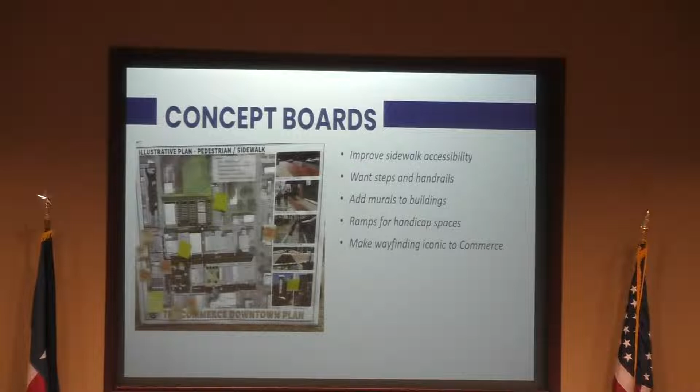We had shown some concept plans at the last meeting, and we got a lot of feedback on that. So we've taken all the feedback and you'll see that in what we're presenting tonight, along with some specifics of the things people mentioned to make sure we were including to make it walkable.

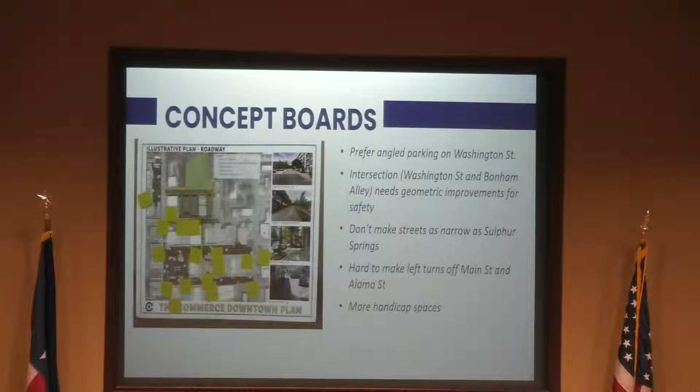We talked a little bit about parking and angle, parallel, where do we need parking? We heard from you all that we were looking initially at trying to widen the sidewalks as much as possible, and we still are. But we heard from a lot of folks that parking is really critical, and we don't want to lose the parking that we have. So we made some adjustments to some of the things we did based on your comments, and got some input on some areas that may be a little hard, where we need to figure out safety and how people turn and so on.

So those were some of the comments we heard. A couple of higher priority items: we had some concepts for both the plaza and the farmers market. For those of you who were here, we presented a couple of different options and got some really good feedback on that - what are the key elements we want to include, such as shade structures and water feature.

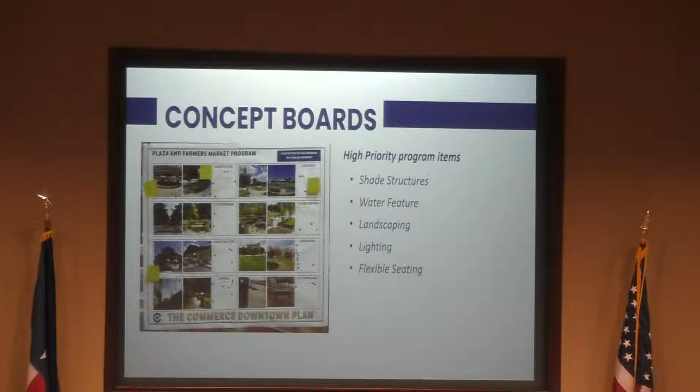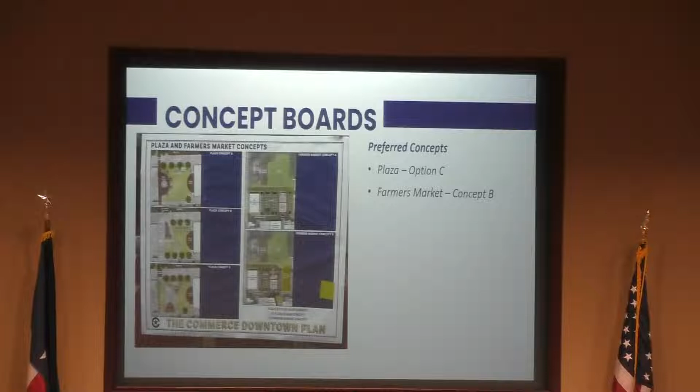And landscaping, lighting, and flexible seating. We also showed a couple of different concepts. Most people chose the bottom concept for the plaza, which again you'll see a refined version of that tonight. And then for the farmers market, we had a couple of different options, and most people preferred again the bottom option, concept B. So we'll present those in just a minute.

In addition to just looking at the core of downtown, Alamo, Washington, and Main, we're also thinking about all the ways we get to downtown, and the signage and the roads leading to that. We know there are some improvements to make in some of those roads outside of just that core, and how do we sign that and those intersections? So we're certainly looking at that. Won't spend a lot of time on it tonight, but we are looking at all the different ways we get there. There's some recommendations on that overall public network of roads.

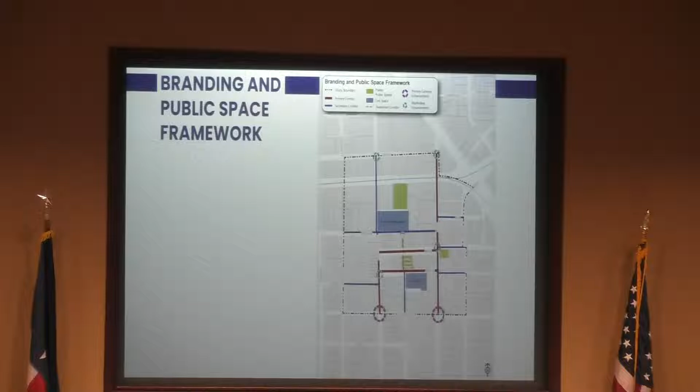We've also broadened that out a bit to look at coming up on any of the key roads, or from the university, how are we getting there? For example, you'll see on the concept here in a moment, we've got a proposal to make this little leg of Washington Street one way for some traffic. But we also recognize, if you're coming in from Washington from the north, that's going to hinder that. So really, how do we drive all the way up there? How do we drive people to Park Street rather than coming in on Washington for various reasons? Not that you can't, but from a signage perspective, we're broadening that out to look at the greater picture.

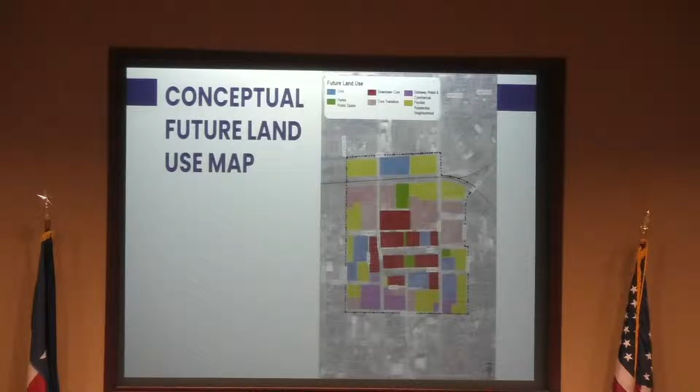And then residential being areas that we want to maintain as residential districts. So this is the overall illustrative concept plan. I know that the detail of this is hard to read on the screen, which is why we've got the boards, and we'll go through some of the details and zoom in on that.

But assuming y'all can all see over my head, you'll see the brick streets, where we're looking at improvements to all of those sidewalks. That is the area we're focusing on. Some improvements to Washington Street.

You see the farmers market area that is just north of Bonham Alley, and improvements to that particular site. That is city-owned property, so we want to make sure that we're not necessarily running out any businesses that are there, but we're looking really at what the city owns and what we can control and what we can do things with.

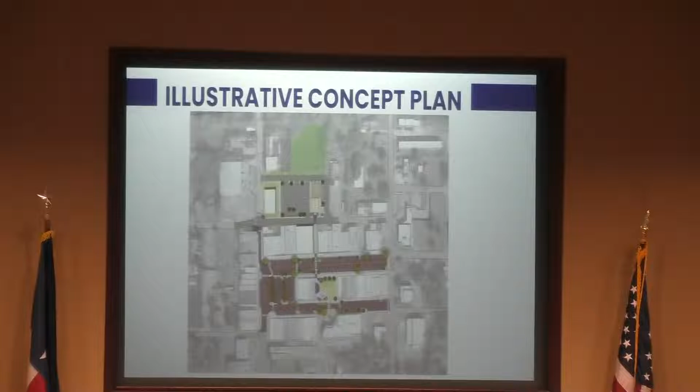So that's our overall illustrative plan. I'm going to break this plan down into manageable chunks so you can see that a little bit further. So one of the key improvements here is Main Street.

Initially, we were thinking about the possibility to maybe narrow that street a little bit so that we could provide more better sidewalk access. We can't really do that. We have met with TxDOT since the last time that we saw y'all because it is a TxDOT road, and we need that lane capacity.

We heard before that we don't want to lose any parking, so we're not touching curb to curb. Now we do propose fixing the curbs that are there and the sidewalks, but the actual curb to curb width of the lanes, we're not changing those. We are trying to keep as much parking as possible.

There are a few bulb outs where the trees are, that some are in pretty rough shape. Some of the trees are dying, and some of them aren't in the best location for what we're doing. So as we think about the sidewalk improvement, we may be suggesting some improvements to some of those or some relocation of that.

But again, general width of the street is the same, but we do want to make better pedestrian connection from what would be the plaza across Main and then eventually over to the farmers market. Better connection as you're going down Main Street and over to Washington, because right now you have to kind of cut over and go up the ramp. And I was walking, if y'all saw me walking around earlier downtown, I was exploring all that. So better connection to those areas.

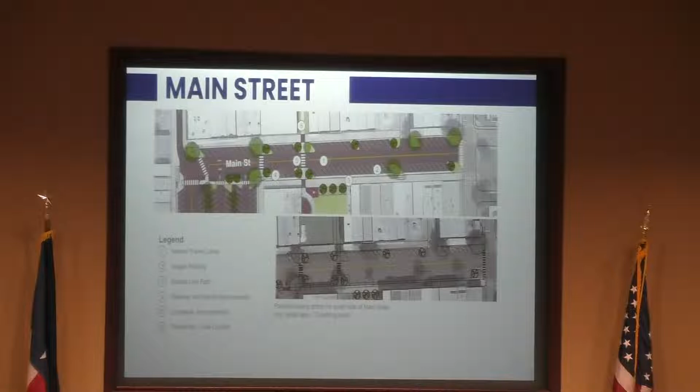These are just some examples of what some of those conditions would be. As Howdy mentioned, this would need to be designed. We know there are grades and a lot of different issues we have to deal with, so it's going to vary. But we've looked at ways to continue the steps along Main Street, because that's a bit of a unique roadway there, and then bring that sidewalk out a little wider where we can.

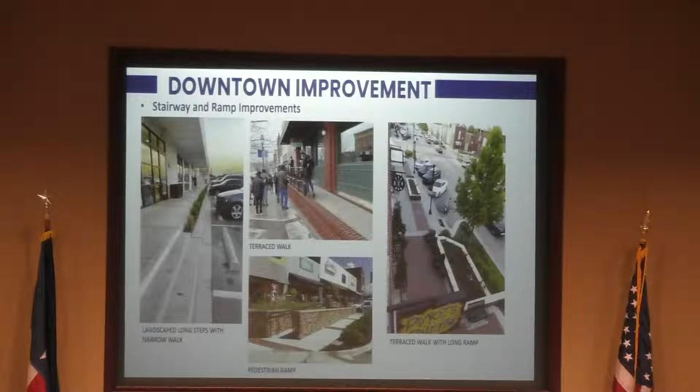And then there are those few corner instances where there may be some really creative things we can do with planters to meet ADA accessibility, and yet beautify those corners.

Another street we are looking at improving is Washington Street. In front of the buildings, we would pretty much fix it, okay? It would be greatly improved, but the angled parking along that street is something we had considered taking out. We've kept that in, because it's one of the things we heard. But the one big change here is considering making Washington Street one way, going north.

Couple of reasons for that. Number one, you've got a tight turn going in there, so to make it a little safer going north. Another reason is if you're at the farmers market coming into downtown, that sidewalk is very, very narrow. So we're looking at how we can widen that sidewalk and make it more pedestrian friendly.

You'll also notice the intersection at the very top left of the page, where there's an area shown - that's the intersection of Bonham Alley and Washington. We know that's unsafe right now. If you're coming down Bonham and take a left-hand turn, that building is so close to the edge that you have to almost pull out into the middle of the street to take the turn.

So we've suggested fixing that road and taking Bonham Alley a little bit north. It would take a little clip of that northern property, but would fix that intersection and make it much safer, at a 90-degree angle, and again improve pedestrian connectivity.

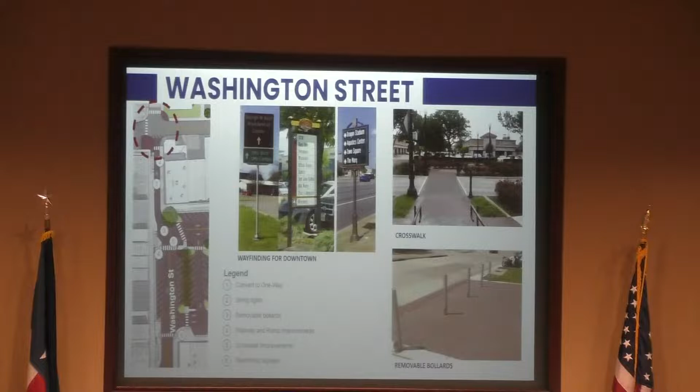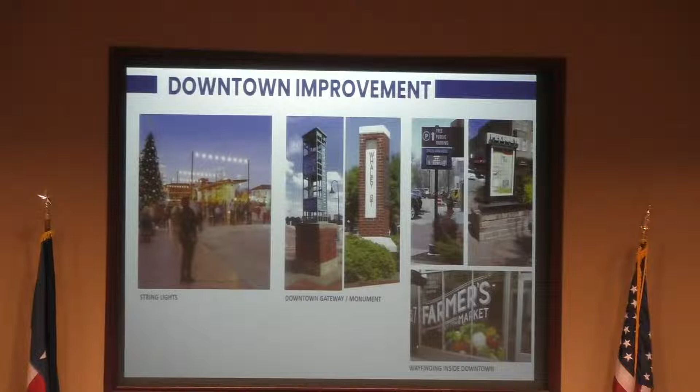That's something that's a really low cost way, and it could give you all some great advertising for businesses that are in transition. So that's something that we suggest from a wayfinding perspective.

Another road is Alamo Road, or Alamo Street. Again, keeping most of the parking. You'll see in just a moment when I show the opportunity for the plaza design, there could be one or two spots that are lost with doing that, but trying to make the stairs a little bit safer in that area.

Also down at the end of Alamo, we know there's a few blind corners where people park right at the end. So what we're proposing, at least conceptually, is that we have a continuous sidewalk all along these roads. In one or two cases, that may mean losing a few spots.

When we get down to design, if those spots are really critical and we need to keep them, we can negotiate and talk about that. But for the purposes of putting a budget together and being able to apply for TxDOT funding, which is one of the things we will be doing, we want to be able to show that continuous sidewalk.

We do know that some of these things marked with big red circles, which you probably saw on one of those maps back there, are intersections and areas we really want to treat carefully, making sure we're providing good pedestrian and vehicular access while still trying to keep our parking as much as possible. So some of those pedestrian improvements, you just see some examples of different ways we can do things.

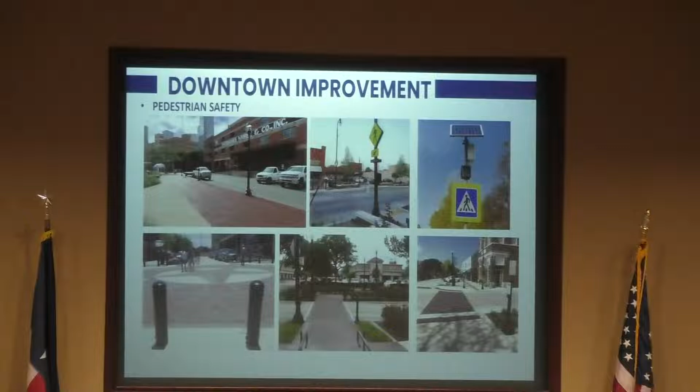So this is a thought about going from the plaza over to the farmers market. Right now there's an empty piece of land, and there's talk about what we could possibly do with that. But whatever we do, one thing we want to make sure we keep is a good pedestrian corridor that gets from the plaza over to the farmers market. We want that view corridor to stay.

I thought this was an interesting example from Sulphur Springs, where they had a new building go into a piece of property, but there's this interesting little walkway that cuts through from street to street. It's not just a straight path, but it's very inviting. If y'all have been there, some of you have seen it, very inviting. Makes you want to walk down - we took our picture in front of the wings like probably everybody else does. Anyway, it was a neat little place, and we thought that idea was pretty applicable for keeping that corridor going through.

So those are the street improvements we recommend in the plan. I want to now focus on the plaza and farmers market design. Again, I give Sherry lots of credit - I'm going to present this for her, but feel free to chime in if you have any thoughts. We took all your comments from the last meeting, and we have a great advisory committee we've been meeting with throughout the process, so they've been giving us good feedback.

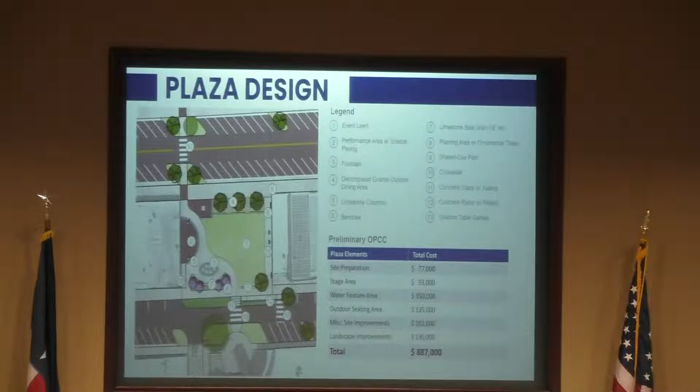There's a lot of different things that could be tweaked on this. In fact, we had some ideas from the advisory committee meeting earlier about shifting the stage a little bit and projecting it almost at an angle to provide more shade. There's a lot of different things we can move around. The key thing we want your feedback on is: do we have the right elements? A lot of these things can be designed. Is it the right scale? Is it the right elements? We want to make sure we've got the cost right.

These are some renderings for that, so I'll let you take a moment to look at that. You'll see we've got the handicap ramp, which is going to be imperative that we get in that area.

We want some way to be able to call out the City of Commerce there. Again, we'd talked earlier about maybe shifting the stage a little bit, and the back side of that stage becomes the sign. So there's some different configurations and things we can do, but overall, the elements of this are some landscape features, an open lawn, trees where we can get them to provide shade, a water feature, and somewhat of a raised performance stage, if you will.

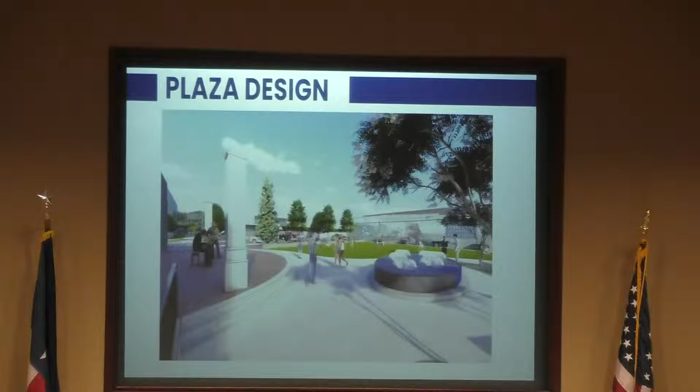This is an example of that. This is an example of what that water feature could look like. This is just another view of that same plaza area, looking back, standing at the mural, and looking across.

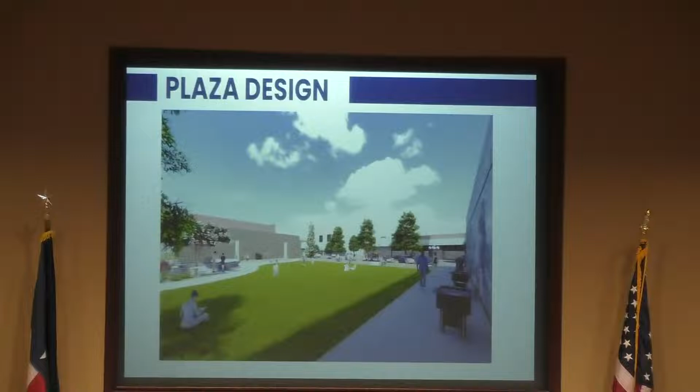In this particular concept, we've got a walkway along that. There could be outdoor gaming things—if y'all have ever seen the outdoor foosball tables or outdoor checker boards, things like that we could create. There's opportunities for those types of things within that.

These are just some examples we use for inspiration photos, if you will, to show. Key thing is, this is a look of a water feature. We weren't planning on doing it since y'all are about to have a great spray park, so we're not going to do that. But we know you've got a marble maker that has opportunity to pull some of that in, which would be cool.

This could be something different—it doesn't even have to be a water feature. We could decide we don't want that element, we want something else, we want to do public art, or a statue, or something else. There are other opportunities we can do there.

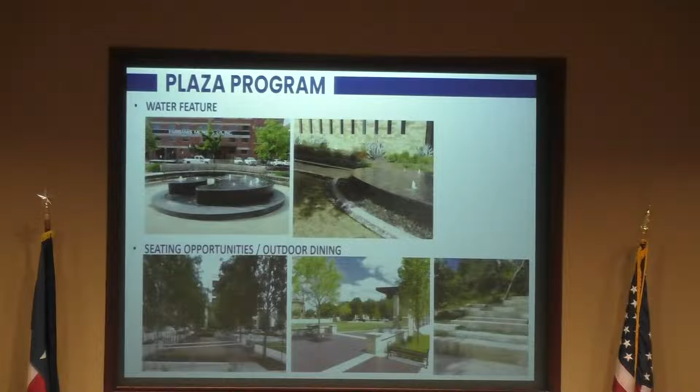We do think it would be very cool to use your marble, your local material, and build that in. You'll see in the bottom right photo ways you could do landscape walls or seating walls using your local materials.

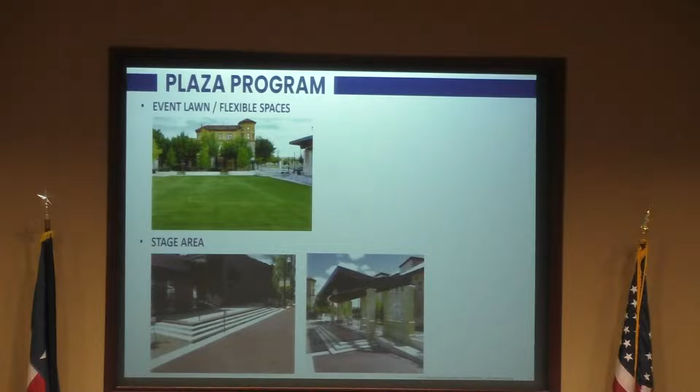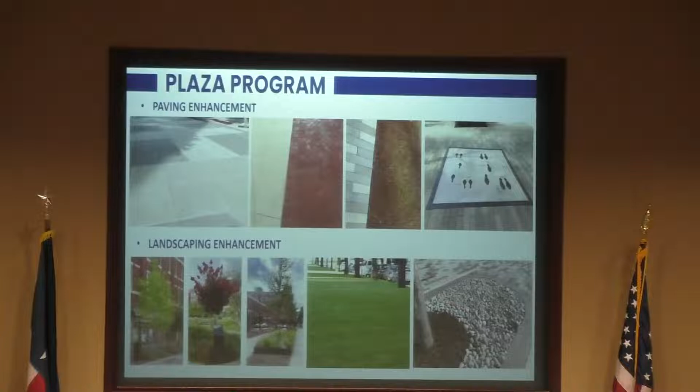This is just an example of a similar event lawn and how that stage, again, could be done—just a couple of steps up so it stays multifunctional, but it's got the plugs and electrical to provide that. I think there's lots of cool things you can do with pavers, and I know you have some historical pavers, so making sure those are incorporated as much as possible, and then the landscaping.

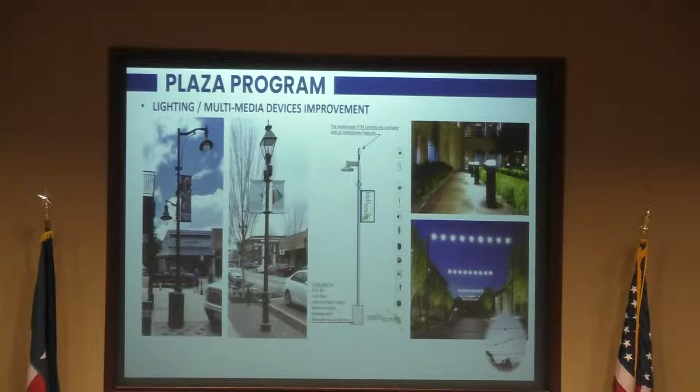Also, with lighting, you have a pretty distinct light within downtown right now. So that's going to be a question if we redo streetscapes—are we redoing that lighting? Because you have lighting that goes throughout. There's a lot of modern technology now that's solar lit. You can do better lighting and better technology now that may not even cost as much. In some cases, we've seen really cool examples of how those are multifunctional—you can plug in your phone, play music out of them, so they become an element in and of themselves.

Okay, so now I'm moving on to the farmers market across on the other side of Bonham Alley. Couple of configurations and thoughts here. So number one is just the pavilion itself.

We do have a restroom as a part of this. I know that was a big request that we heard, so it could function throughout downtown. We reconfigured that based on input at the last meeting so that it's more visible. We had that in the back, but people said no, we want that up front so that even if we're not using the farmers market, that still feels safe and accessible. So we moved that around. We've got roughly about 60 parking spaces within that.

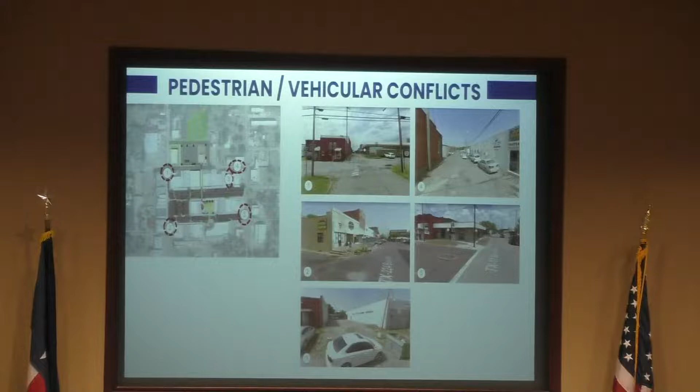Or do we really want to make it more pedestrian friendly and safer for people to walk? In that case, for some of those uses, we need to think about the long-term viability. And in some cases it's about making sure we're making something safe for vehicles. So I do think you have a few conflict areas that we're trying to solve. We'd love some thoughts on what we're really designing for, what's most important, because there are going to be some conflicts we'll have to figure out—like needing to lose a few spots for pedestrian safety, or rethinking a use to do some of these road improvements we want. So those are things to think about.

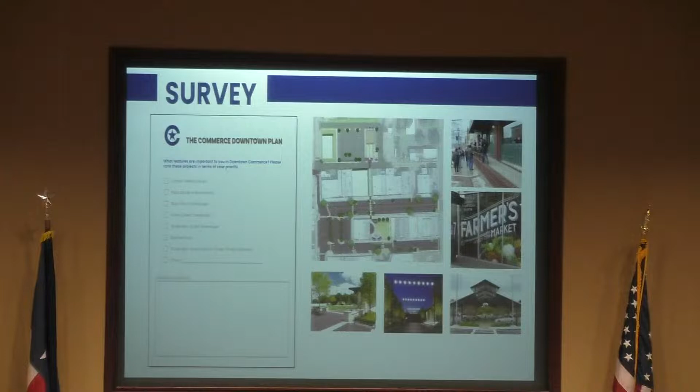So I'd love to hear your priorities. If we have to prioritize and we can only do one or two things, what are those? So if we're going to pass those out, give us your ranking of what you would do first. There's some place in there for comments of why, or maybe there's something else. Maybe there's something we didn't mention that you want us to add to the list, or there's other priorities. So we'll pass that out here in just a moment.

So in closing, just to tell you all our next steps, we're going to be around for a while. We'll answer any questions that we have at the board. We'll gladly talk through any specific input you have. We'll take notes as we always do. Chris is over here going to be taking notes for us. But we're going to review all the comments that we got from the committee earlier today, and also your comments tonight. We'll be revising our report. We'll be providing a final summary report to the city for review, and then we will be coming forward with adoption meetings to get this adopted so that we can then move on to hopefully the next step of getting some funding and then further design.

Okay, we're not putting the survey out yet.